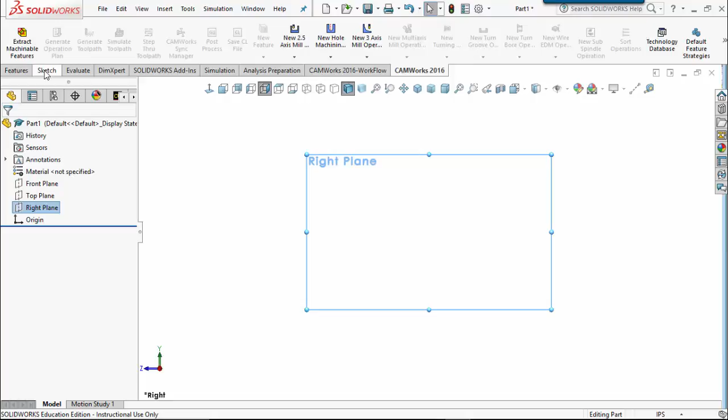So the first thing I want to do is set myself normal to the right plane. So we'll set ourselves normal to the right plane, and then what we need to do is draw 3 concentric circles. So we go to Sketch, create a new sketch, and start drawing the circle. So we'll come over here and draw a circle, come over here, draw another circle, come over here and draw a third circle.

Now, as you notice, since we were working with Dragster, we designed in millimeters, so we need to come down here and change our working units to millimeter gram second. So I'm going to go ahead and change that, and now I want to edit those units and make sure I'm at 4 decimal points. At least on one of them I am, so let's go ahead and turn that to 4. Set that here, set that here, and that looks good. So we hit OK.

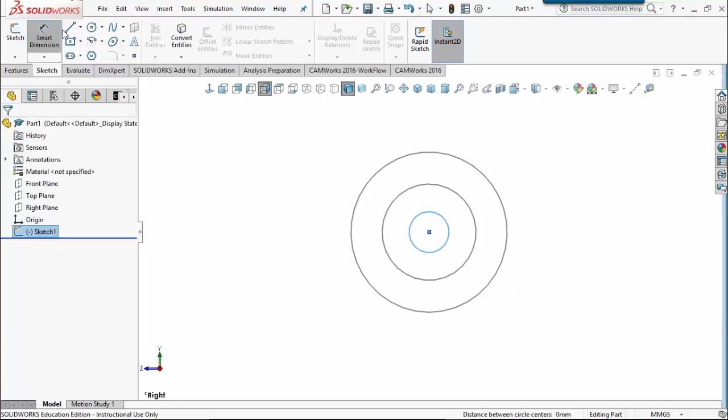Okay, so now what we need to do is go ahead and dimension the first concentric circle. As I select it, I'll smart dimension it, hopefully. Let's try that again. Alright, we'll get out of that, reset, rebuild, and we'll save our file. Let's go ahead and do that real quick. We'll save it to our hard drive. I have a special place.

I'm actually using a different computer, but I did upgrade my other computer to SOLIDWORKS, and it's working great, so I'm really happy with that.

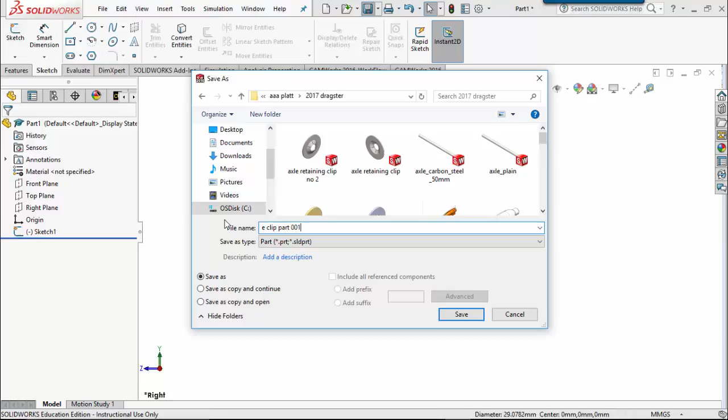So let me go find where I put my stuff. I think it's right here, and it's definitely in Dragster. Oh, there's the old famous axle retaining clips. So we're going to go ahead and say E-clip, and we're going to say part 1, 001, kind of a version freak, so I've got to put that in there. So I'll go back to my sketch, edit my sketch, and we'll come in here and start dimensioning it. Okay, it likes that better.

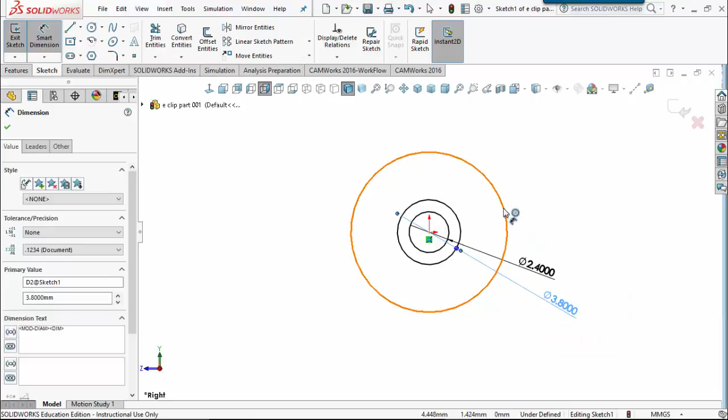So I'm going to key in 2.4 millimeters, hit OK, and then on this outer dimension here, this next dimension, I'm going to come back and key in 3.8 millimeters, hit OK, and then on this dimension here, I'm going to go ahead and key in 4.8 millimeters. Okay, so there we are. Let's go ahead and check that dimension off.

Let's hit our F key to, whoop, that's zoomed way out. Got to figure out what's going on here. I think that looks pretty good actually. We'll just go from there. Alright, save our file. Okay, so that's saved.

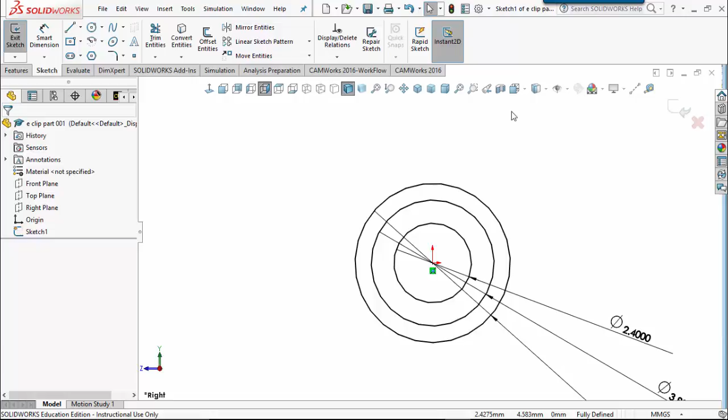Now, the next thing we want to do is draw a center line. The way I'm going to draw this center line is I'll come up here, still in this sketch. Make sure that you're still in the sketch. When I drew this thing the first time for practice, I wasn't in the same sketch, so it kind of confused me a bit. So I'll start here off this dimension, and I'll just come over, making sure that I'm staying definitely horizontal. I'll click on that, then I'll hit escape, and I'll come back over here, and I'll do another center line, just arbitrarily up to this point.

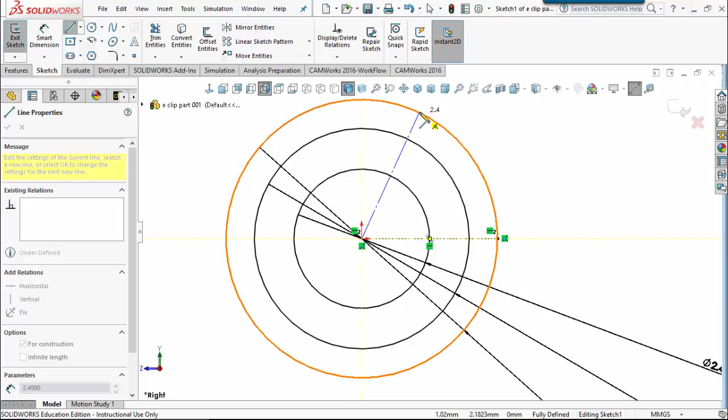I don't really care where, but I'll smart dimension that. I need to set that to 70 degrees, pretty close at 64, so we'll say 70 degrees. Let's put that in there like that. Okay, that looks pretty good. Now, hold on one second here. I think I went too far. Yeah, I did. I should have only gone up to the second one, so that's not a problem. We'll go ahead and check that off.

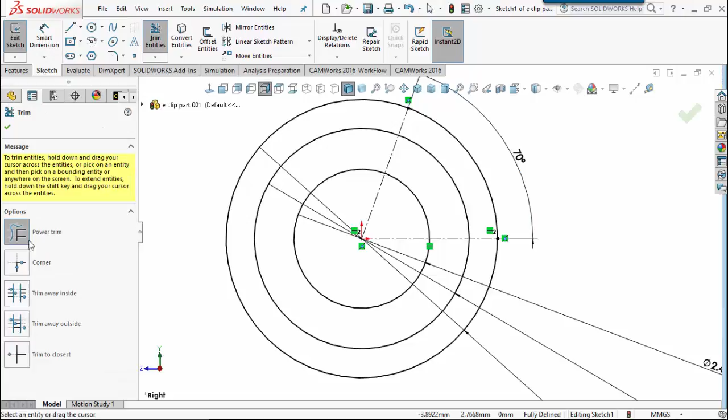We'll go up here to Trim Entities, hit our Power Trim, and we'll get this last one there and this one right here. I think I'm correct now. It looks pretty good. We'll go ahead and do a rebuild, and looking at what I got and what's on the tutorial, I think we're good. Alright.

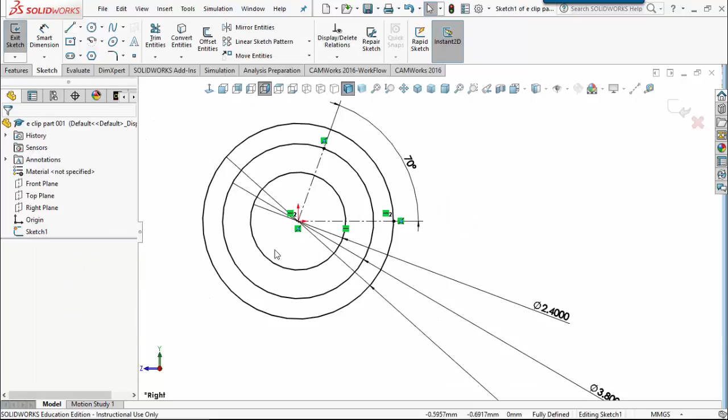So, moving right along, what we want to do right now is we're going to do a new command called trim to closest entity. So we're going to go back up to the sketch, right mouse click, make sure we're editing that sketch. We'll zoom up here and we'll get the trim entities. And now what we're going to do is says trim to closest.

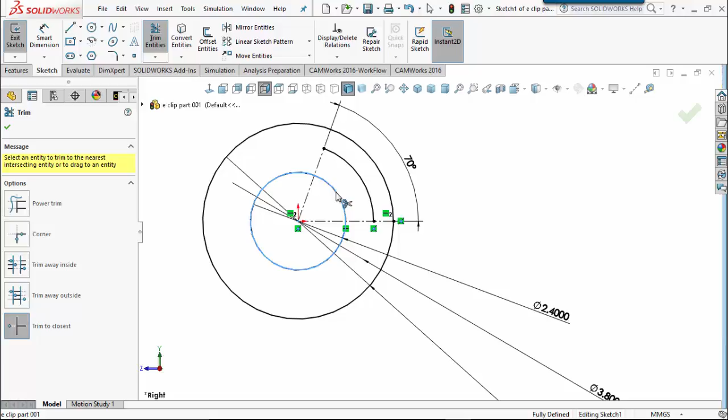Now I'm going to go ahead and trim this line right here. And let's see, I got that one correct? Yeah, that looks pretty good. And then I'm going to trim this one right here. So I'll go ahead and get that out of there too. So I think that looks correct. It looks like it does to me. We'll accept that. Again, always between each major step, save and rebuild. Rebuild and save. Okay.

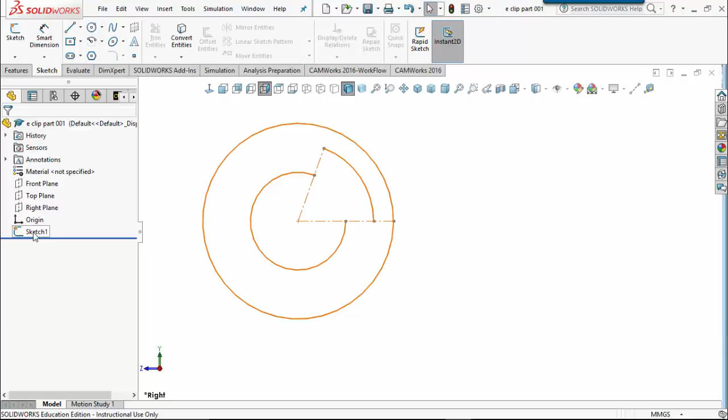Now, after that, we're going to go ahead and draw some more center lines. So we'll come back over here, back in our sketch. Always stay in that sketch. We'll come over here now and draw some more center lines. We're going to go from here on the center, right on our datum. We're going to come straight up here to that edge, and we're going to click on that. Okay, now hit the escape command, go back to the same one, and I'll do another center line. I'm just going to come down here in space somewhere, pretty much tangent on that one outside circle.

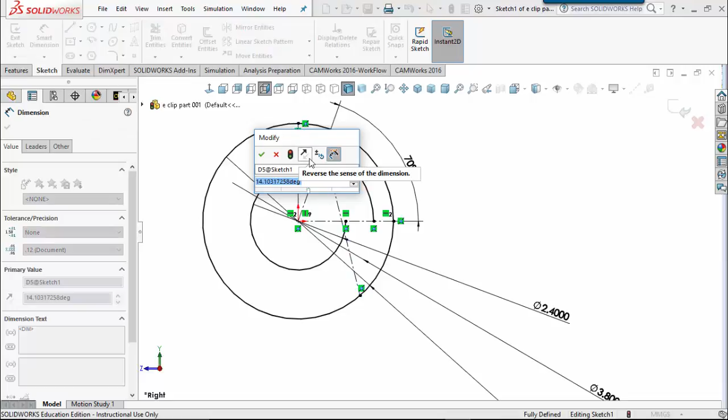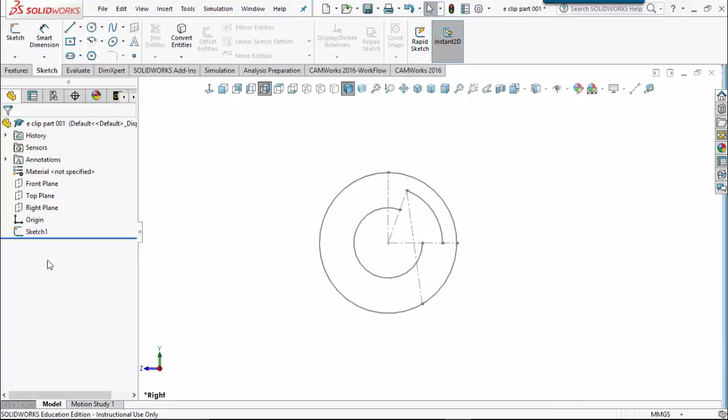Then I'll go up and hit my friend the Smart Dimension command. We accept that, accept this, and we're going to key in 8 degrees. So we key in 8 degrees, and that puts that in at 8 degrees. That looks pretty good. Alright, let's go ahead and check that off. That looks good. So now we're going to go ahead and add lines. So we're going to come up here to the add line command, and we're going to still be in that sketch. Oh, got to rebuild it. That's real quick. Make sure we're still editing that sketch. That's good. We're going to come up here and hit the line command, and we're going to add a line from there to there.

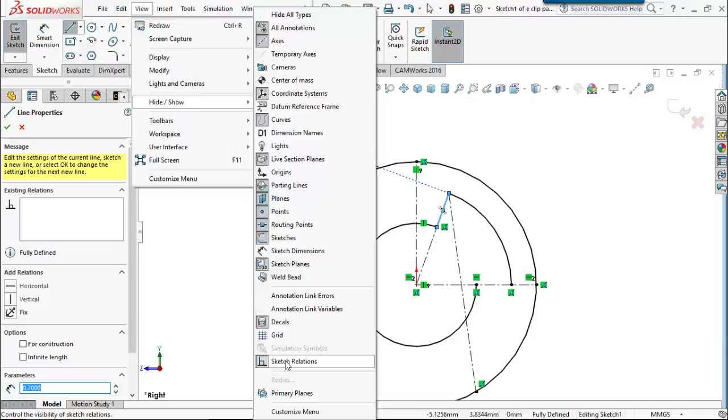Now I know it looks kind of annoying, these green little boxes here. Those are your sketch relations. So I can come up here and go hide, show, and come down here and turn off those sketch relations. I think they're in there somewhere. I turn off my sketch dimensions. That's kind of annoying to me. I can come view, hide, show, and there's sketch dimensions I turned off. Where's that other one I was looking for? Temporary axes, all annotations. I don't want to do that. We'll go with this for now. I think I can survive on this, but I normally do not like seeing those sketch relations. So, oh, there it is. I'm blind. Okay, so we got that in.

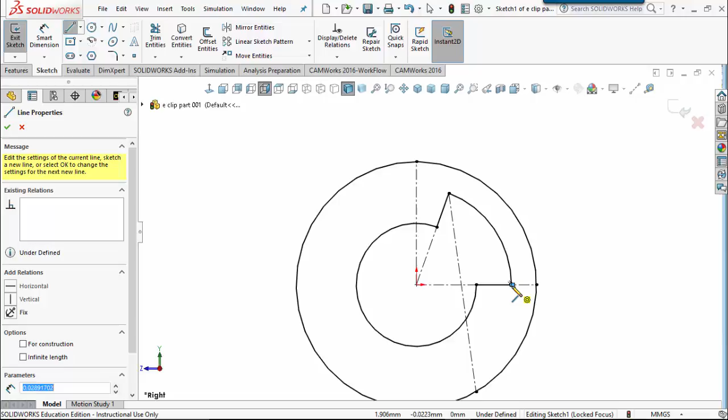So we're going to check off this one line, and we're going to go back here and draw another one. So our next line is going to be right here, and we're going to go from this point to that point. Okay, that looks pretty good. Now, what we want to do is go back and trim. So we're going to go back to our trim entities. We can check that off. Go back to trim entities.

And what we want to do now is trim this outer line right there. So we'll get rid of it. And let's see, what else do I want to trim out? I think I want to get rid of this guy right there. Yeah, that looks pretty good. So I got rid of that. Alright, we're starting to see a shape kind of come into place here.

Sorry for all the background noise. I'm washing my clothes for work next week, and my Labrador Retriever is chewing on everything he can get his hands on, so forgive me for that. Kind of a little bit of comic relief there, I guess.

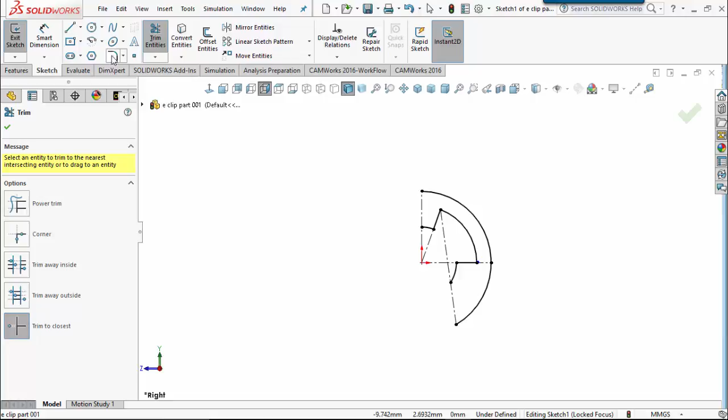So now we're going to go to Sketch Fillet, and let's see what we're going to select. We're going to select on this guy right here, and let's zoom up on that a little bit so we can kind of see it.

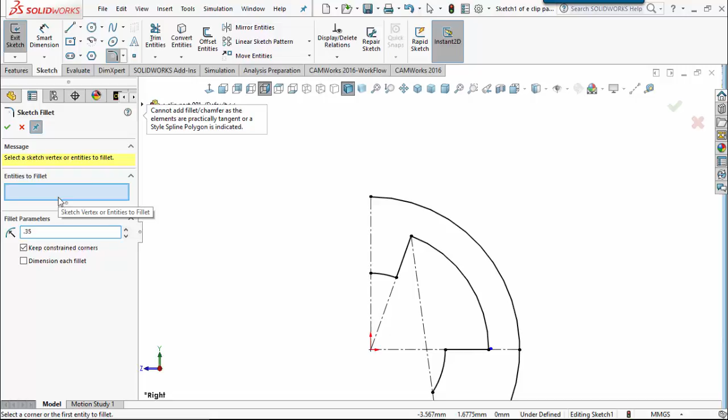So we're going to hit this guy right there, and we're going to give it a dimension of, I want to say 0.35 of a millimeter. So we'll select that, and we'll select that again. We'll see if it gets it. Yeah, there it is. You can see it a little bit better.

So we said 0.35. Actually, I want to change that. I want to make that actually just 0.3 millimeters. Okay, we hit our tab key, so make sure it gets it. It did. So now let's go ahead and get this guy right there. We'll put him in. Okay, that's looking pretty good. So we're going to go ahead and check this one off here.

And now what we want to do is we want to do another sketch fillet. Oh, I forgot to add one more line. That's my bad. So we need to come back here and just go ahead and check that off. Let's go back here and add a line from here to there. Check that off. We'll go back and add us a fillet. And then this one, we're going to say

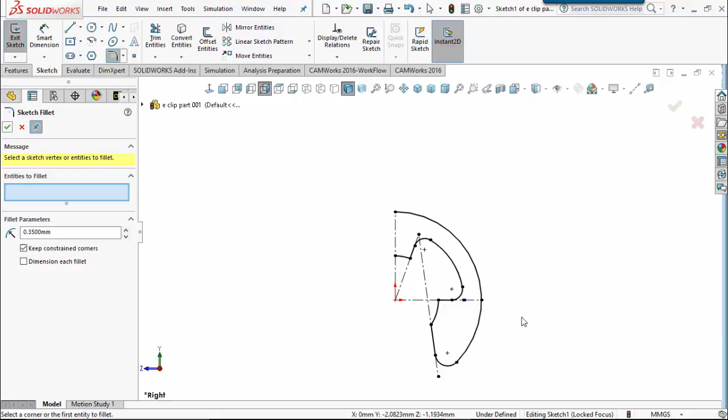0.35. Okay. So I'll select this guy, or hit that off and accept it. And then I'll come down here to this point and I'll put that in there. Accept that. Okay, that looks pretty good. Let's go ahead and accept that. Let's do a rebuild, and of course always we've got to save.

Now what I want to do is I'm going to go back to our famous sketch here. We're going to open that up, and we're going to mirror entities, and it says mirror about entities. So I'm going to say mirror about this line here. Actually, that's the entities I want to mirror. Let's go clear that out. We're going to mirror about this guy right there.

Okay, so now let's go get the entities to mirror. So we're going to select this guy here, and we're going to select this guy here. Okay, oh, wrong field. Let's clear this out again. I got ahead of myself. Clear this out. Entities to mirror about. It's going to be this center line. Go back to this one here, and make sure that you got copy set.

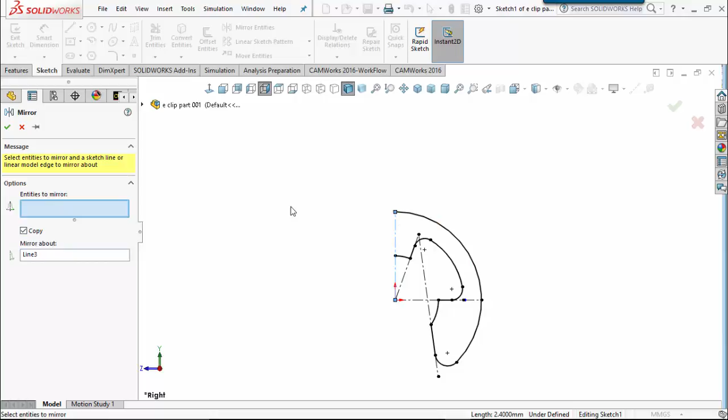Okay, so we're going to select this guy, and we're going to come around and we're going to get him, him, him, him. And as you can see, it's populating the other side in the gold and yellow color there. Get this guy, this guy, this guy, and this guy. All right, that looks good. So we'll accept that. So that looks pretty awesome. Okay, so we got our sketch in the way we want.

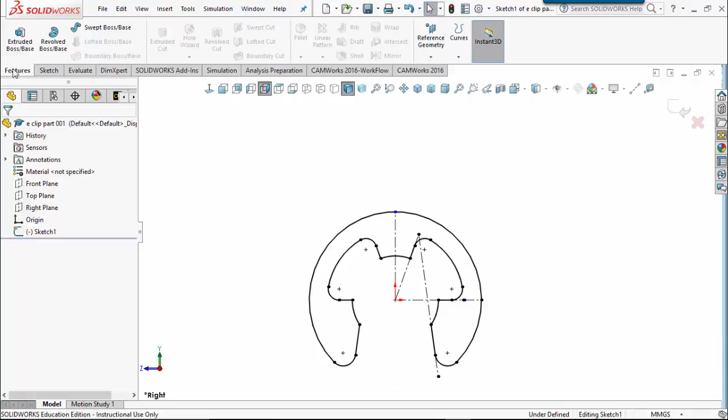Now, the next key thing that we've got to do is we got to do an extrude. So, again, let's rebuild. Since we did a major operation there, let's save. Let's go back into that sketch just for kicks and grins. And now we're going to do an extrude. So now as we do an extrude, it's going to come out and we're going to set this to mid-plane. So there might be something going on here I'm not real clear on. Let's go ahead and select this.

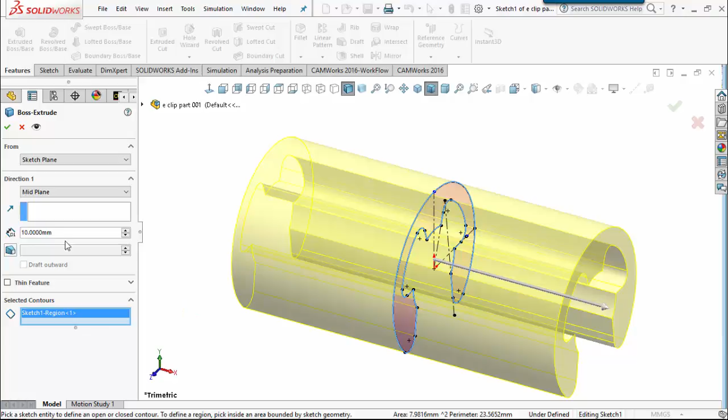Wow, that extruded it all right. That's actually your temporary view, but it shows it actually extruding it from both directions. So what we can do at this point here, we want to go ahead and give it a depth of 0.25, which would be basically half a millimeter. 0.25, hit the tab key, and we're going to go ahead and accept that. All right, that looks pretty awesome. Let's go ahead and rebuild that. Let's go ahead and save that.

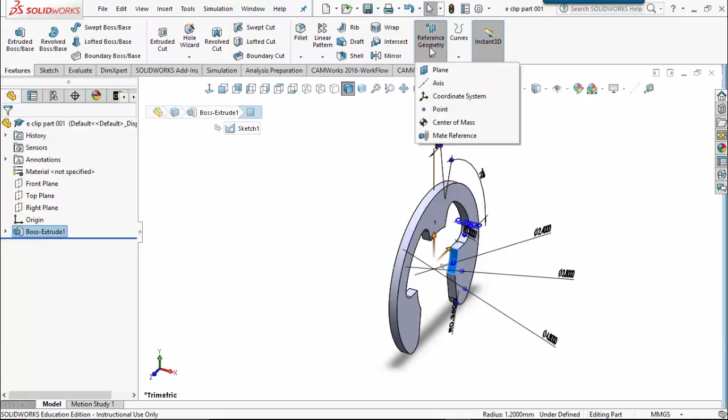Now what we need to do is we need to set up what's called a reference geometry, a mate reference that we're going to use later on. And we will use it later on because when we got to put our axles together, we got to put this on the axle. So we're going to select that surface right there. We're going to come over here to reference geometry, and we're going to say a mate reference, and we're going to establish that face, and we're going to say check. That's pretty cool. So we got that one.

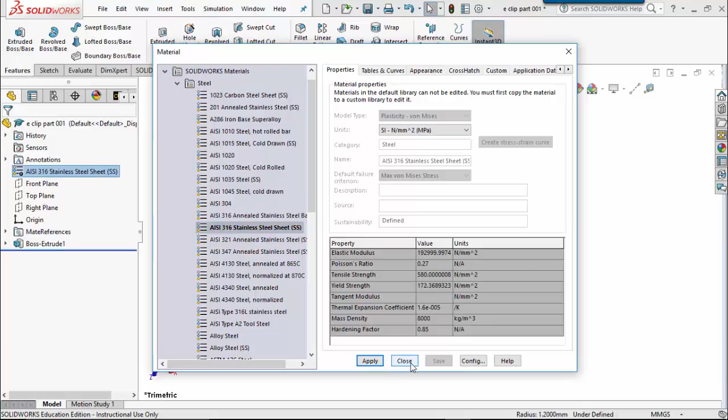All right. Now we got to tell what kind of material it is. So this right now, we're going to edit material. It's going to always bring up the steel, and what we want to select is AISI stainless steel sheet right there. That's what we want to select. We're going to hit that, apply it. We're going to hit close, and so there we have it. Our part is drawn. Our part is modeled correctly.

Now we're going to have to come back and put this in our assembly. We'll do that in the next video.